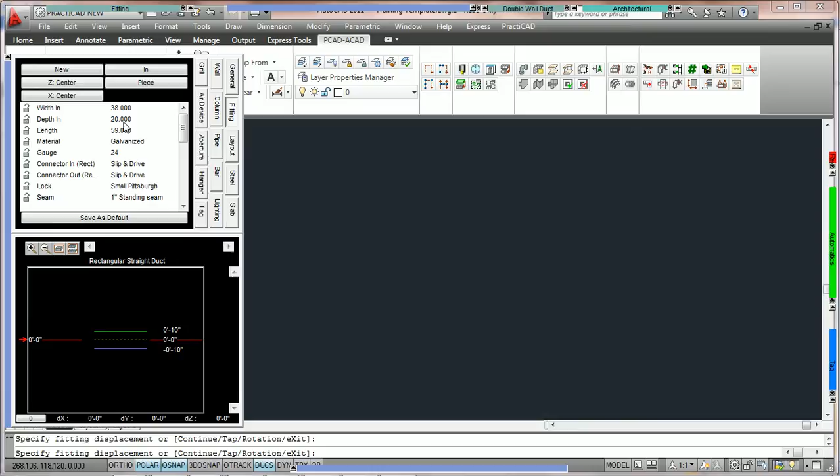Once we do that, you'll notice that PractiCAD will already have adjusted the width and depth to fit the liner. What was once 36 by 18, when we add 1-inch acoustic liner, is now going to be 38 by 20. Now what we're going to do is we're going to place this fitting on the drawing. Once we do that, you should be able to see not only the fitting, but the liner inside.

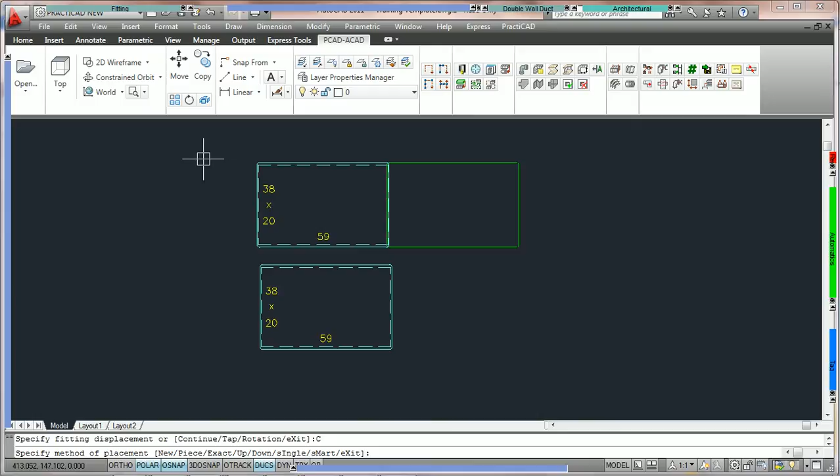Now the way it works in PractiCAD when you're drawing is the liner is going to stay on every fitting until we shut it off. For example, if we put a new piece down or hit C for continue and continue off an existing piece, we're going to continue to have that liner.

However, if we're going to come into the fitting box and then we're going to shut the liner off for one piece, that piece will not get it, and then the piece after that will not get it. So as long as we draw now, there will be no liner. So the mechanism is usually turned on or turned off.

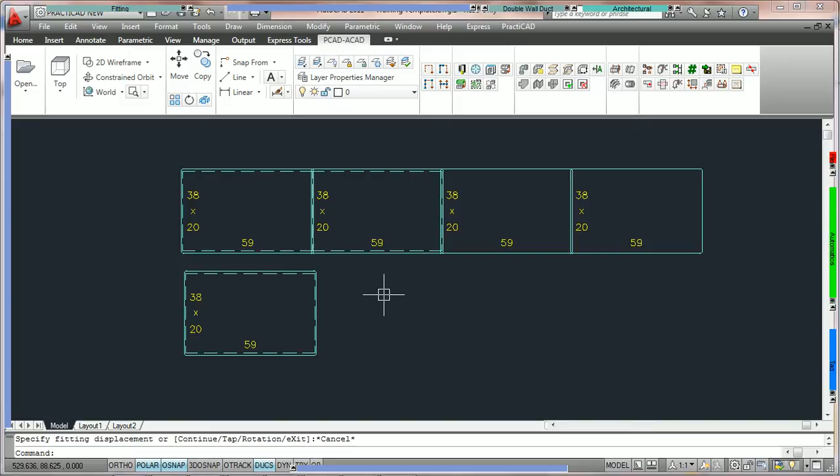Remember that at any time you can adjust the liner, both insulation or acoustic liner, by simply clicking on the fittings you'd like to change, double clicking to get the AutoCAD property box to open up as we've done here. And if you go to your technology properties, you're going to see under acoustic liner exactly what we've placed. So if we'd like to remove it, we would just open up this drop down menu and we're going to select nothing.

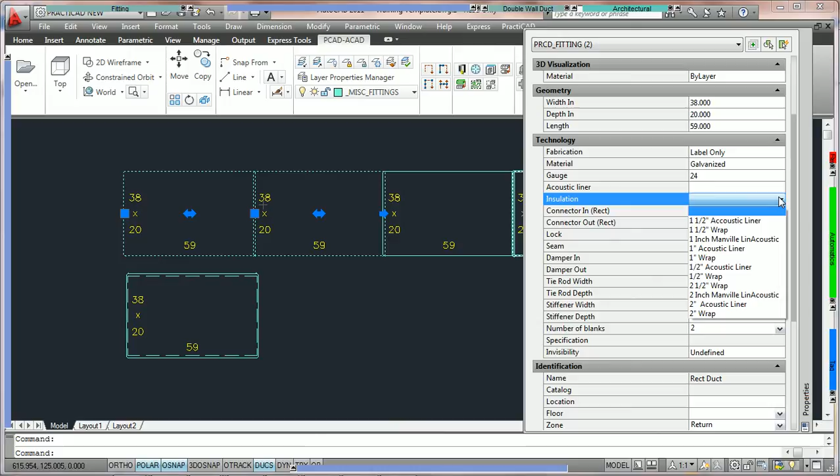Same thing if we'd like to add wrap. If we'd like to add wrap to the fitting, instead of using the acoustic liner property, we're actually going to go down to the insulation property, and here we're going to choose 1-inch wrap. And by doing that, PractiCAD's simply going to add it to the existing fittings, so we can edit the fittings and edit the liner at any time.

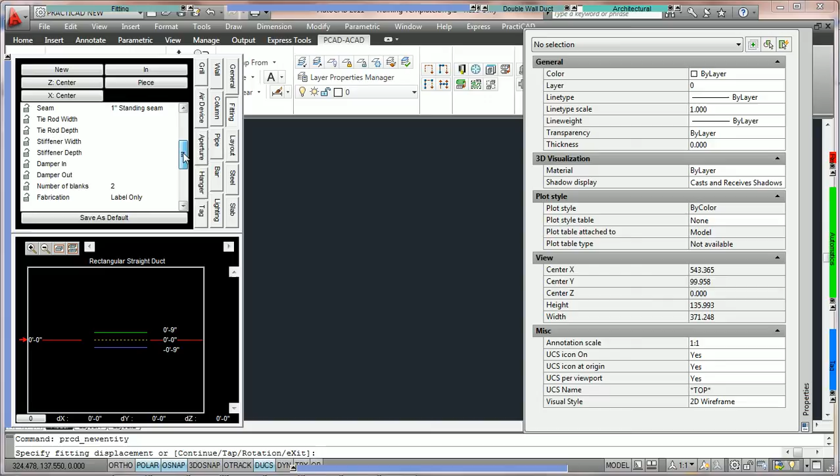If we're going to add wrap from the fitting box, it would be the identical way we did it with acoustic liner. We'd simply go into the fitting bin and choose the fitting we'd like. We're going to come over here, scroll down to where we see insulation. We're going to select 1-inch wrap, and now we can simply place this duct on the drawing, and as we continue, we're going to get wrap added as we go. That'll conclude the tutorials on how to place down acoustic lining and wrap.